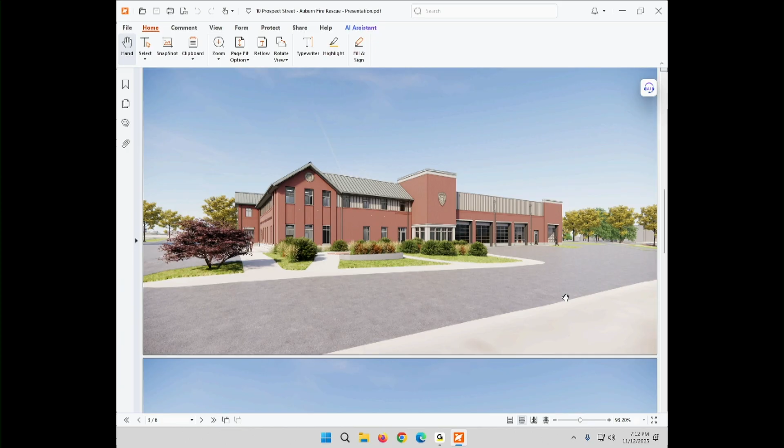If we go to the next slide, this is kind of like the front view pointing towards Washington Street. You can see the main entrance coming out a little bit from the building. And then on the right side, you can see the view that we previously saw — that is pretty much the apparatus bay and the concrete apron where the trucks and ambulances will be coming in and out from the building.

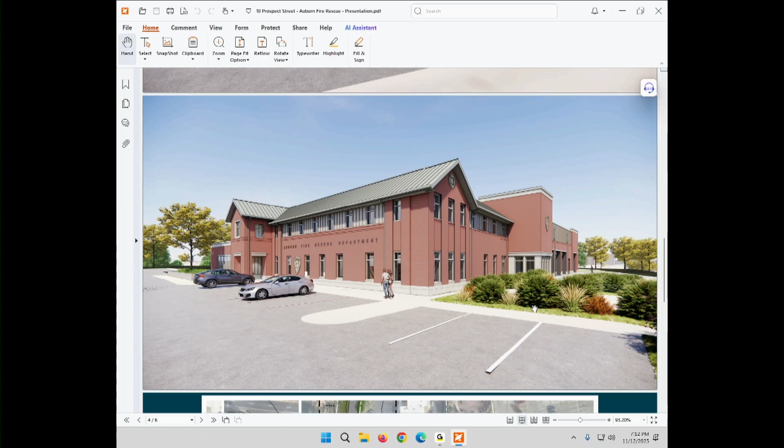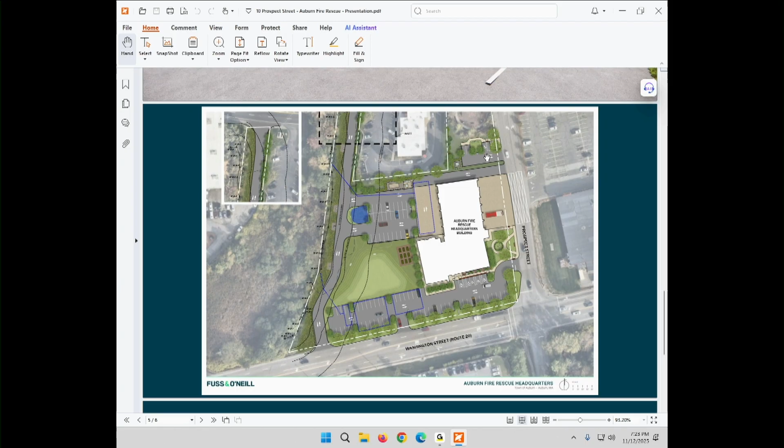The main reason for all of this and the need to drop the site down is that the configuration of the building, like we said before, you have access on the right side for the trucks and on the left side, so you need to maintain that topography all around the building. And then to be able to have all that parking on the rear portion of the site, you need to propose a slope there that's not something that when you park, you feel you're gonna fall. You want to keep it as flat as possible.

Sure, and then similar situation is happening on the front. So like where we are connecting the existing curb cuts, we are not proposing to change any grades on Washington Street at all, so we are gonna be meeting grades there. But those elevations there are about elevation 642. And then we're just gonna work our way to the building, which we are proposing to have a finished floor of 638.5.

So in order for us to pick up this side more, we'll have to slide the building more towards the left, or we will have to have a steeper slope along the concrete apron, which we're trying to keep below 4% so the fire trucks can go in and out easily. So that's kind of the reason why we're dropping the site.

Any other questions from the board? Nope. Michelle?

So there's not going, so from Washington Street or for any of the streets going down into that parking lot, there's not a deep decrease into the parking lot, right? So like if you're on Washington Street, the parking lot, the front parking lot, is actually gonna be at a lower elevation than Washington Street.

It says invasive species, including purple loosestrife and broadleaf cattail, which is Typha latifolia, were observed throughout the wetland. To my knowledge, if this is saying that Typha latifolia is an invasive species, I don't think that's true. To my knowledge, it's completely native to North America and here. So that may not affect anything with the plan, but I wanted that to be noted, that it is native vegetation. What was that section again?

It's in the narrative, so that would be on page 2 of the narrative, section 2.3.2, bordering vegetated wetlands.

Okay, and which one was the exact planting you were referring to? The Typha latifolia. It sounds like from that sentence it's being described as invasive vegetation, like purple loosestrife is invasive, but the cattail is a native species, that species of cattail. So just the language there makes it sound like it's being described as invasive vegetation. I don't think that affects anything directly, but I wanted to note that that's native vegetation.

No, I appreciate that. I will definitely confirm with my landscape architect and wetland scientist, and I'll make sure to get back to you on that one and update it if needed. Thank you for the observation.

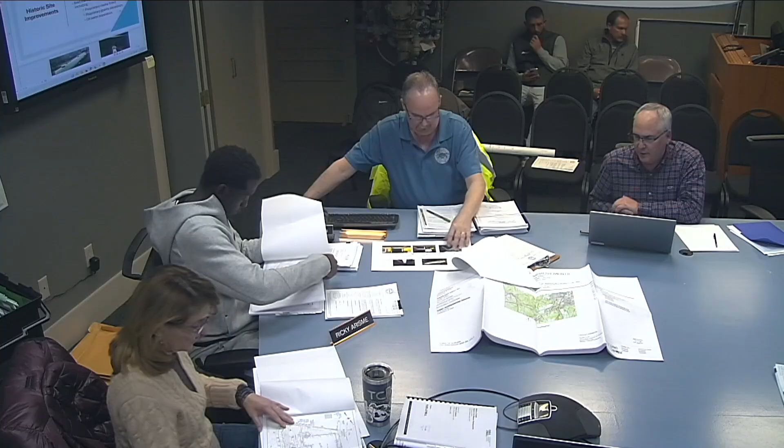It's a final measure, and even its ability to detain stormwater is somewhat compromised. It was constructed around 1995, designed just prior to that. This lists some of the history, what has been done and why. Some of the improvements are obviously best management practices on site. We've worked with them for a number of years to make sure those are maximized.

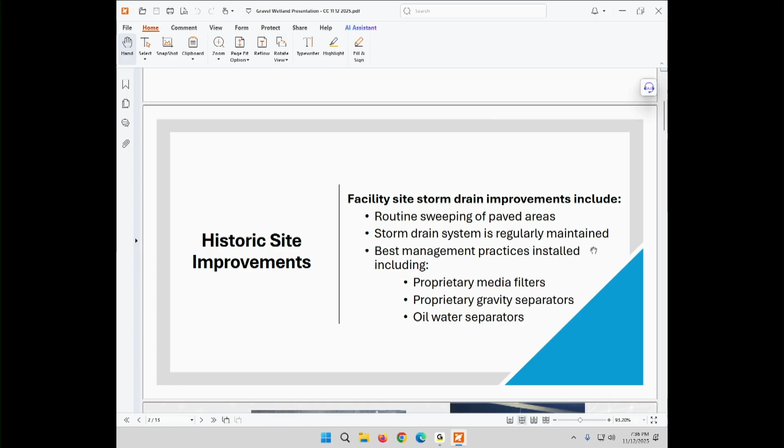Active BMPs are stressed on the storm drain system. We've installed proprietary systems, media filters that treat runoff from the rooftops, which are galvanized, to remove zinc. There are gravity separators, which are really a combo unit - settlement units for sediment that also retain oil. There's also a 12,000 gallon oil water separator on site, and generally the runoff in the impervious area all runs through those systems.

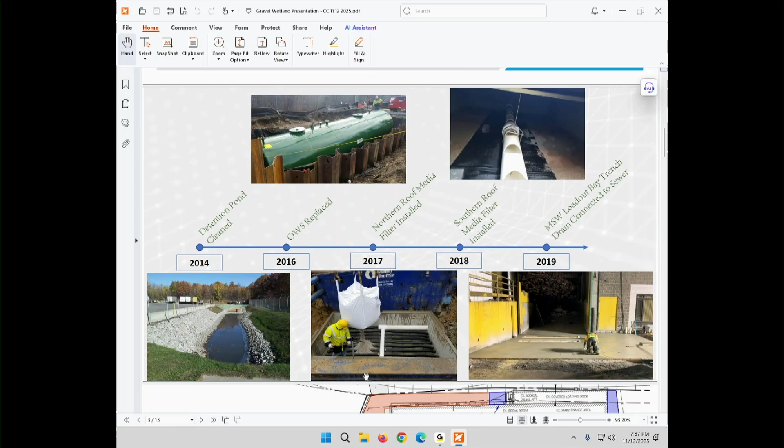Those are just images and timelines of different items that were installed. Up to the left is the 12,000 gallon oil water separator. To the right is a media filter - proprietary media, layers specifically to remove zinc and other metals, primarily zinc. There are two of those on site to capture the entire rooftop system. To the left is a view of the pond that was cleaned at that time, and then there's another media filter and drainage items. We can move on to the next slide.

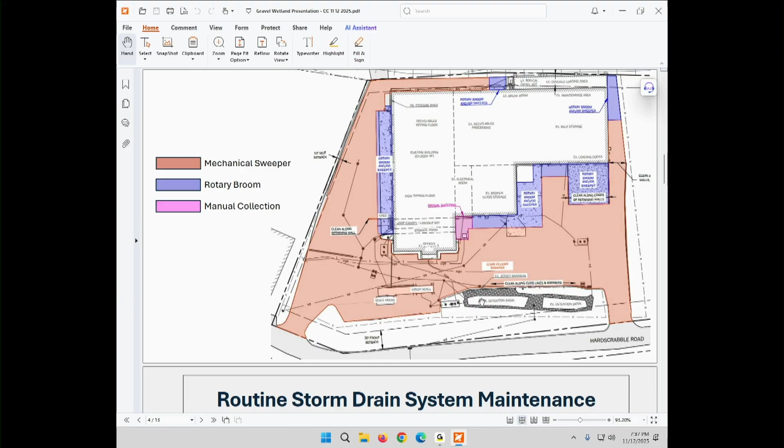This shows the site itself. This happens to be a sweeping program we've highlighted, but it also shows the drainage system. It's mechanical sweeping done daily, and we noted where it's rotary broomed or manually swept. That's one of the programs put in place. This is a list of some of the storm drain system maintenance done routinely there - catch basin cleaning, the storm drain system cleaned quarterly by vendors.

The trench drains are cleaned when there's 1 inch of sediment present, and they're inspected monthly anyway at a minimum. The oil water separator, the 12,000 gallon system, is cleaned annually, and obviously they have training for their personnel on water compliance, plans and systems.

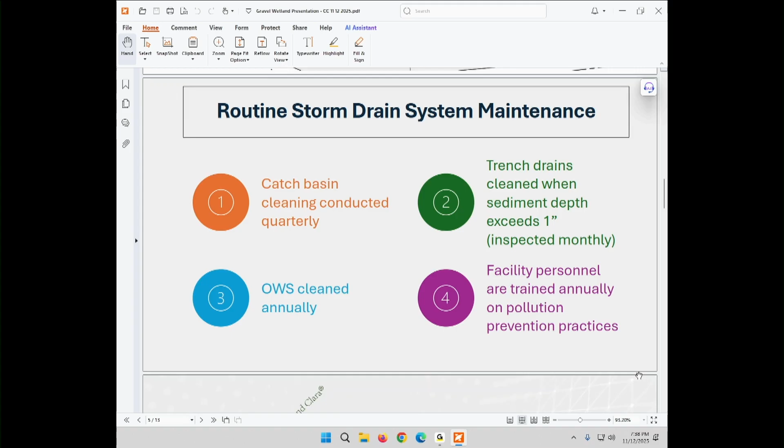So hit the next one. That just gives you an idea of some of the systems out there.

One of the things I mentioned, there's two of these on site. To the right are Clara units, the trade name. They're segregated 4-chambered systems with a high flow bypass that goes through the system and doesn't resuspend sediment. They're pretty effective at trapping sediment, so they act as an oil water separator if there happens to be a spill, and they have significant storage capacity to prevent discharge from the site.

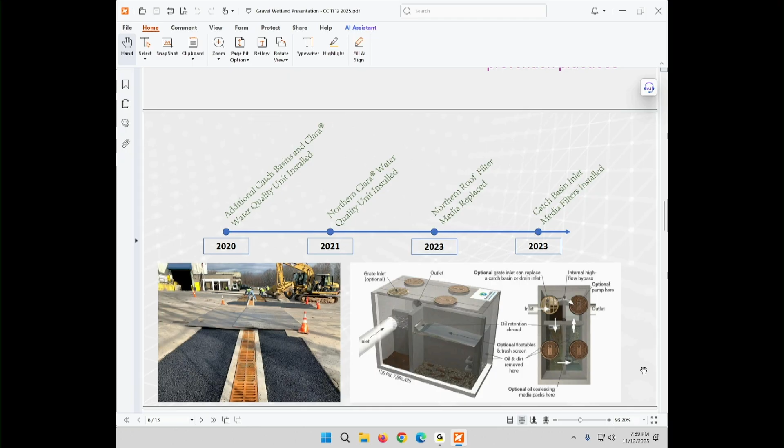The one thing gravel wetlands do far better than a traditional detention pond is give consistent treatment performance. One of the things Auburn has struggled with is peaks and valleys in the concentration results. The predictability and effectiveness of the gravel wetlands have been really good in Allenstown, so we expect the same results here.

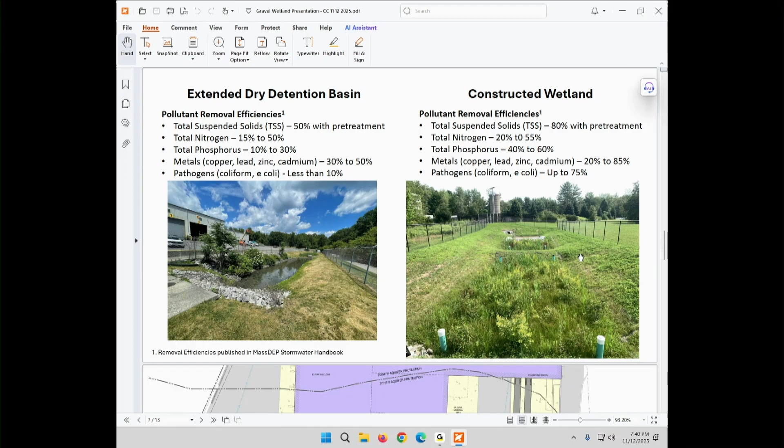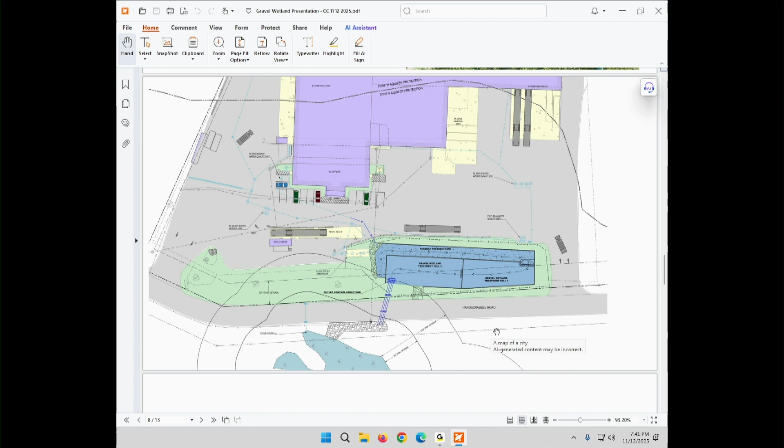One of the challenges here is it's not a proprietary system. I'm glad we have more experience with them now, and we're under construction with one that's basically substantially complete at a transfer station in Oxford. One issue with proprietary systems is they're more difficult to maintain and can foul easily. The gravel wetland doesn't have those characteristics. I think it generally fits in better with the landscape and facilities, and it's a nice buffer in a lot of cases. Again, they're efficient and the maintenance is pretty limited, so for those reasons they're advantageous.

This is just a general schematic of a gravel wetland. This doesn't show it, but all of them, including this one, have what they call a forebay for settling—a detention area at the head of the unit, at the start of the gravel wetland, that drains directly into two different cells. We can look at the drawings in a minute, but it's always two cells.

University of New Hampshire really pioneered this for stormwater. Originally these were used for sewage treatment, industrial wastewater and so forth, and other technology kind of smothered it over the years. But UNH smartly brought it back, and a lot of this comes out of UNH's Stormwater Center.

So the trick is—and they're efficient too—but the trick is replicating a gravel wetland, a natural wetland, in some ways. On the surface you've got your forebay draining into one of the two cells, and the object is to drive it down below grade, below your wetland soil. That brown layer at the top, under what's shown as grassed wetland plant areas, is 3/4 inch gravel—highly porous, with lots of capacity for stormwater—and the system drives it down. You'll see those standpipes, perforated vertical pipes that also help drive water down into that area. That area is anaerobic, and microbes develop over time, providing really effective treatment in combination with the plant life and root systems of the wetland plantings installed in these two cells.

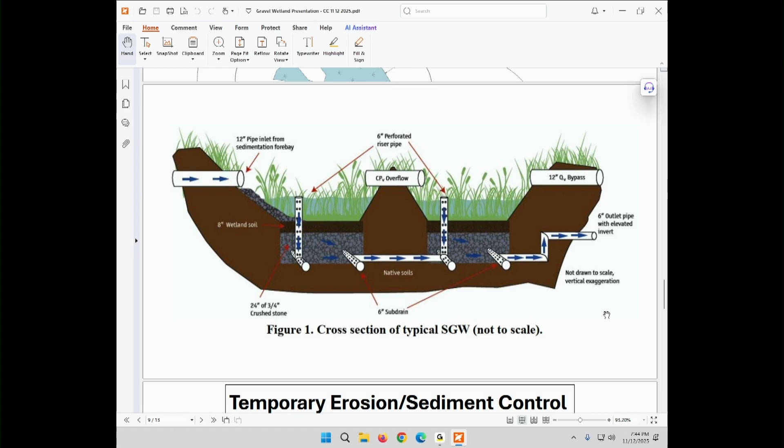About times in drought, is there any impact? There really isn't. We've lined ours—they're industrial facilities, so we've put an HDPE liner on the base of these, including this one. It's very well protected beneath the one with the orifice and the control. The water can only go so low, so you really don't have evaporation below the wetland soils to any degree. Within that area, it stays.

It looks like the footprint for the system is going to be larger than what's there now. It is. By what, about 50%? I don't know the exact percentage, but that's close. Really close, yes.

In terms of construction, how long does it take to install? I think it's 2 to 4 months. It's going to depend on the approach—the contractor selected and so forth—but it outsizes the existing pond. We just needed that for the treatment capacity and the detention volume, storage capacity above it.

So while construction is going on, is the existing pond still functioning? That's the problem. We have one place to put this, and we have to bypass stormwater, at least in the initial phases of construction. So how do you do that?

Well, it doesn't fully bypass the system, and if you go to the drawings, I can try to show you. There you go, keep going. Yeah, if you can go to the other file, that actually shows it.

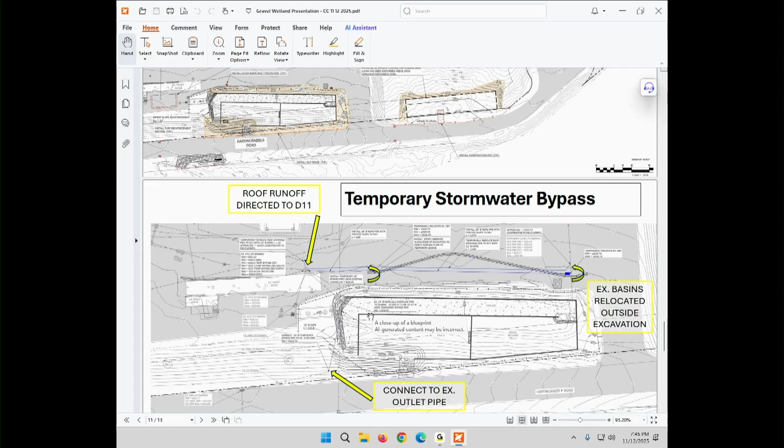One thing obviously is we're operating within that footprint in the midst of their operations, but what we're doing is basically cordoning off the area with Jersey barriers above—like an eyebrow almost over the area between those two yellow arrows. And so the only two drainage points that don't go through the rest of the system, critically the oil water separator, the 12,000 gallon oil water separator, are those two drainage ways.

One on the very right, where that yellow loop line or arrow is, is roof runoff from the north end of the building or roof. The other one is the other roof drain filter from the south part of the roof. Both of those are filtered through proprietary structures before they would even go into the oil water separator and eventually be discharged from the site.

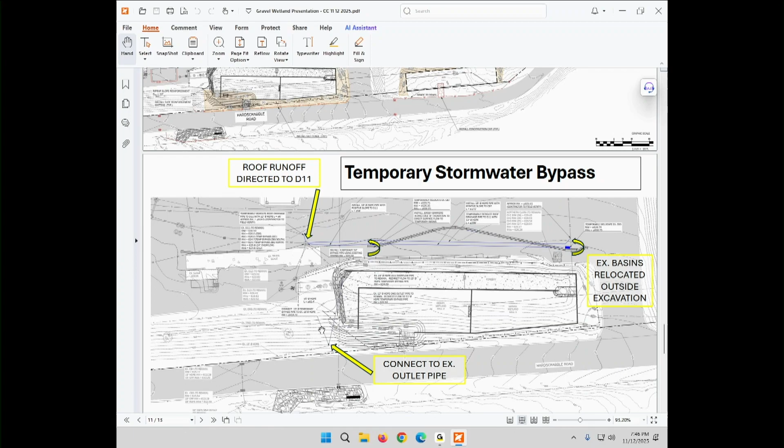How long would it take to construct? In total, the project is 2 to 4 months. Would you do this in the spring? Probably early spring, try to get started.

If you want to open the file, you have drawings. Give it at least— Yeah, I don't have the other one, so— Do you have hard copies here? Oh, okay.

So it looks like you also proposed an alternate site. I'm curious why you did that.

That off Hardscrabble Road is for a potential laydown area. We've talked to the fire department about utilizing portions of Hardscrabble Road and that turnaround as laydown area for the contractor. Depending on what's truly available, they're agreeable to it. We still have to go through the site plan process as well, but we're going to utilize as much as we safely can for the contractor.